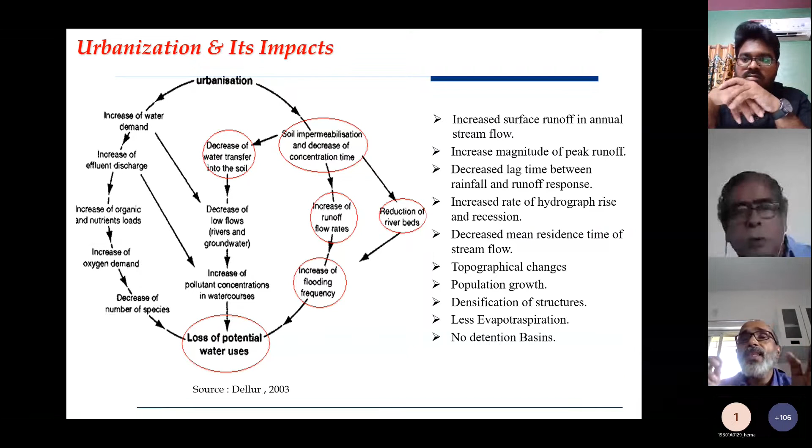In the beginning, there is no planning in most cities, and later when we try to impose something, construction and many activities have already taken place. Cities are developed on river banks or even floodplains of the river, which is a major challenge. That is why land use planning is very, very important in any kind of smart urban development or urban development.

So you see the various issues related to hydrology, when we talk about floods, what is the impact of urbanization? If a normal watershed, normal catchment, for a given rainfall condition, we get what we call a hydrograph - a flat hydrograph. But with urbanization, this can become very peaked. The peak can increase and time of concentration can decrease.

That is a major challenge as far as the hydrology cycle is concerned with respect to urbanization, whatever we are doing as far as cities are concerned. So we need to see how we can deal with this reduced time, and also how we can deal with these kinds of peaks.

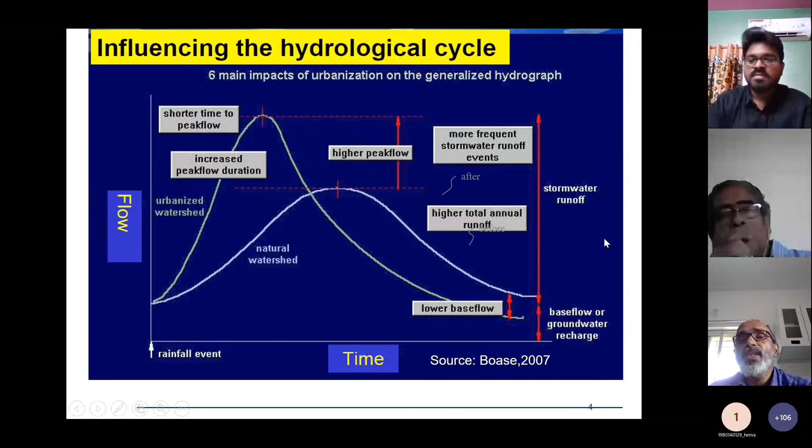As I mentioned, climate change projections say rainfall may increase in many locations, and whatever rainfall takes place will happen in few events - meaning very high intense rainfall can take place, causing flooding events like what has happened in the last few weeks in Europe and other countries, similarly in India also, Bihar and other places. High impact will be there, and all these issues will become flooding issues and hazards.

If you look into flood hazards as far as sustainable development is concerned, floods are the most threatening natural disasters. Whenever we plan anything, whenever we do urban development or smart cities, we need to consider these kinds of urban flood problems.

If you consider India, this is a series of floods. So many years we can see - last year in Assam, flood in Assam, Bihar, now Kerala 2018, Chennai 2015, like that. Every year major floods are taking place in a country like India. Since I am talking from Mumbai, Mumbai also has either major floods or minor floods every year. Flood is there every year.

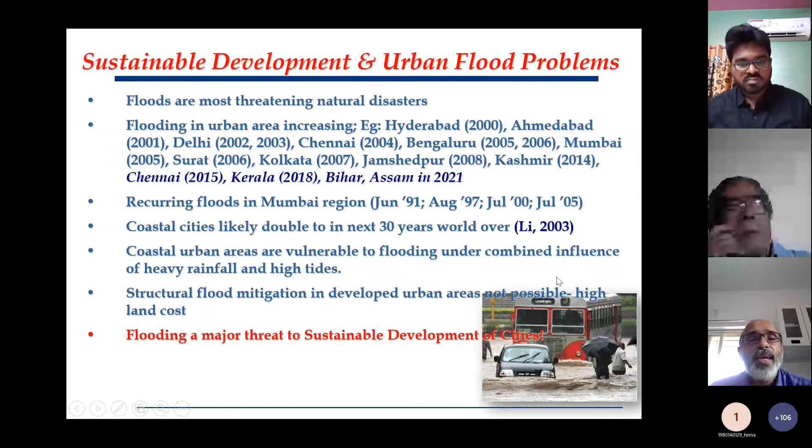So we need to see what is happening, and we need to study it properly, and also plan accordingly as far as urbanization or urban development is concerned. Flooding is a major threat to sustainable development of cities. We need to deal with it accordingly.

When we talk about flood impacts in terms of sustainable development, there are huge impacts - it can be economic, it can be environmental damage, it can be health epidemics, disabilities, etc.

If you take each flood series - for example, I will start since I was also a victim of the Mumbai 2005 flood. There almost 500 people died, and about 70 crores of rupees were lost in one industrial area at MIDC itself. And in the Chennai flood of 2015, about 7 to 10 billion US dollars were lost, and more than 400 people died.

The Kerala flood, which was 2 years back, caused death of more than 300 people, and estimated loss is about 30,000 crores rupees. This is a major issue when we talk about smart development, smart cities, construction technology, or sustainable development. As civil engineers, we need to deal with this and plan by considering all those things.

When you talk about what factors are responsible for this, it is not one factor - it is not only rain. There are human activities, development taking place without considering sustainability - that is one major factor. And then of course natural events like rainfall, and man-made events like climate change. All these are factors. The solution is sustainable development.

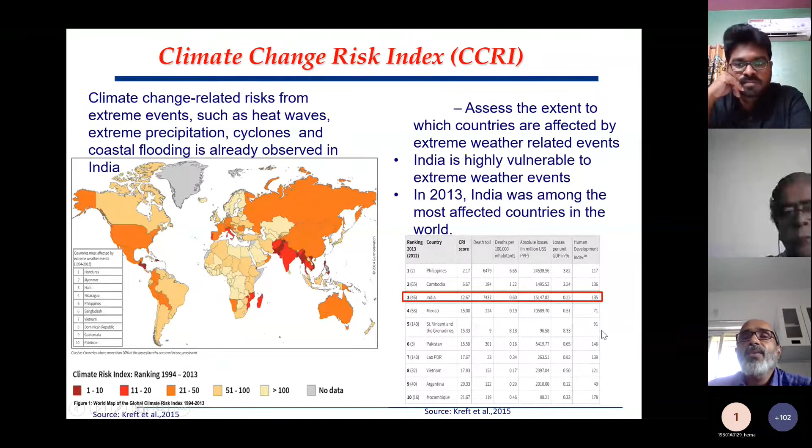So then coming to climate change. We are all talking about climate change. Climate change risk is concerned with risk from extreme events such as heat waves, extreme precipitation, cyclones, and coastal flooding. As per IPCC reports, they have classified climate change risk index. India comes after Philippines, the most affected, then Cambodia, and then third one is India, especially India with so much of coastal region. We have got a climate change risk which is very high. So that way we need to deal with these kinds of climate change influences.

So climate change is concerned with influence of climate change and human intervention on regional hydrology. Changes in global climate will have a significant effect on regional or local hydrology. Then alteration of hydrology caused by climate are complex. The warming of climate has the potential to intensify the hydrology cycle. So these are the climate change aspects.

Especially we are talking about increasing temperature due to various anthropogenic activities. So that way the climate change, we can feel it now. If we assess the last 30 years of data, it is definitely there everywhere, that impact is there.

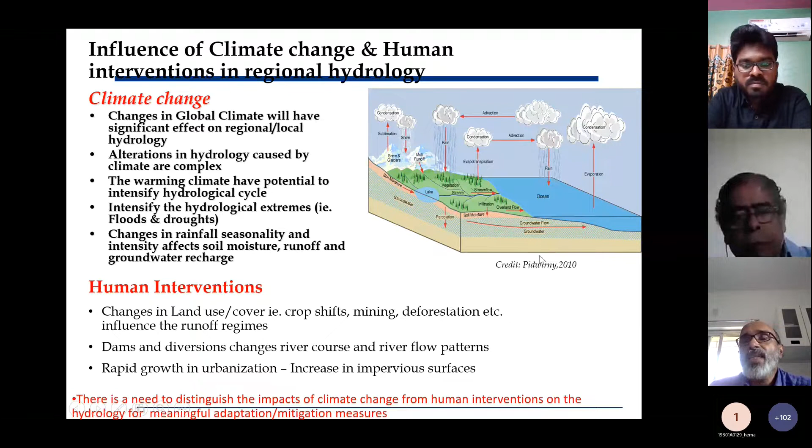And then, as I mentioned, human interventions - it is not only climate change. Whatever way we are developing our development scenarios, like sustainable development, sustainable construction technologies, how we are developing human intervention, change in land use, land cover, dams, diversion - all those things are very important. So whenever we talk about these kinds of assessments, we need to see the human interventions and climate change separately, and then we can also assess the combined impact.

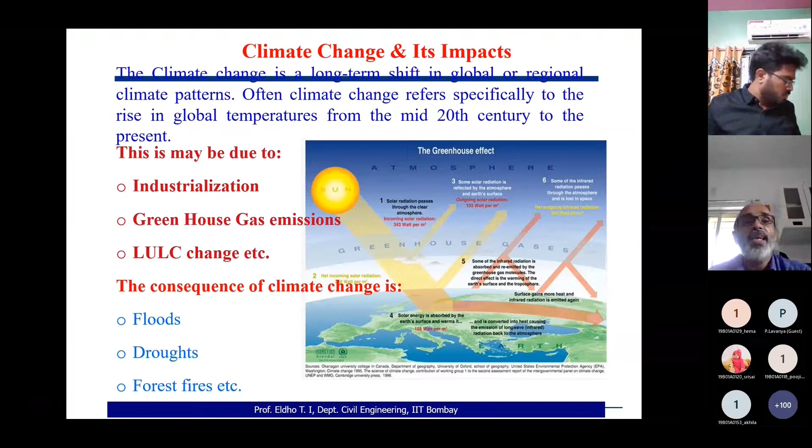And then last year we have heard from Australia, and then other than floods, drought is also in many locations. So even whenever we are having floods, after events of floods, then we are having a very lean period of rainfall, and then it can go to the droughts. So that is the major issue.

So now, as per the latest assessment, AR assessment report number 6, climate scenarios as per IPCC - instead of whatever was earlier, like RCPs, representative concentration pathways was the terminology used in assessment report 5, but now they have changed to shared socio-economic pathways. So this is important, what is currently used is shared socio-economic pathways, and the latest is 2021.

According to IPCC, they are classified into SSP 1, 2.6. So if we can cut down our emissions and reduce the rise in temperature, then we can go to 2.6. But with the current rate, it can go to SSP 4.5. That is shared socio-economic pathways. And then if we are increasing our emissions by rapid urbanization and all kinds of industrial activities, then we may go to even 7 or 8.5, with a very high greenhouse gas emission scenario without additional efforts to contain emissions. So these are some of the main issues.

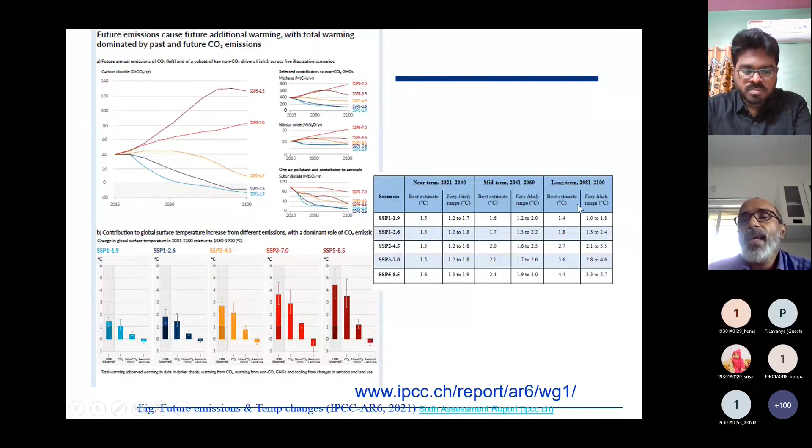The temperature variation is also listed here. What can happen? If it goes to 8.5, the temperature can rise to about 4 degrees centigrade by end of the century. But if we can cut down to 1.4, or even 2 or below, that is the best way we can control many of these issues. So when we talk about climate change and its impact, there is huge impact on hydrology.

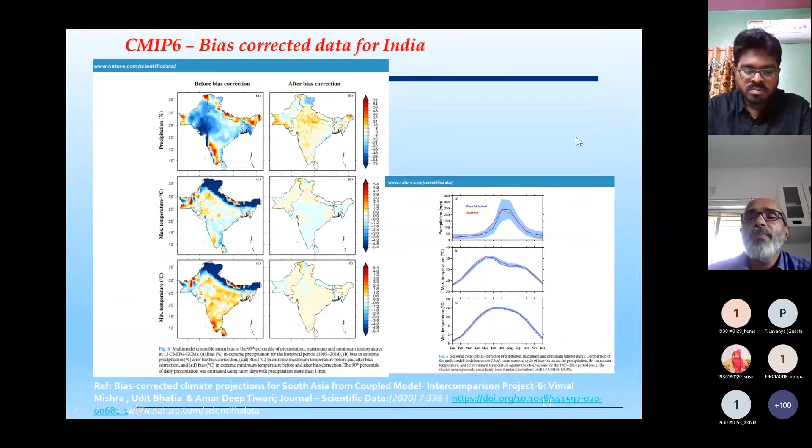This is quite detrimental as far as any kind of urbanization or development is concerned, especially in coastal regions, where there will be a huge impact. Some observations show that if it's not SSP 4.5 or 2.6 but 5 and above, we get approximately 20 to 40% increase in annual mean precipitation, and mean annual temperature may rise by 3 to 4 degrees centigrade by end of the century, as I already mentioned, with mean annual minimum temperature also rising.

This first figure shows precipitation — most places precipitation is increasing. We want the 4.5 scenario, which is the best scenario as I mentioned, compared to the worst scenario of 8.5. At least with 4.5, even at the same pace we continue, many locations will have increasing rainfall, and temperature in most places shows a drastic increase.

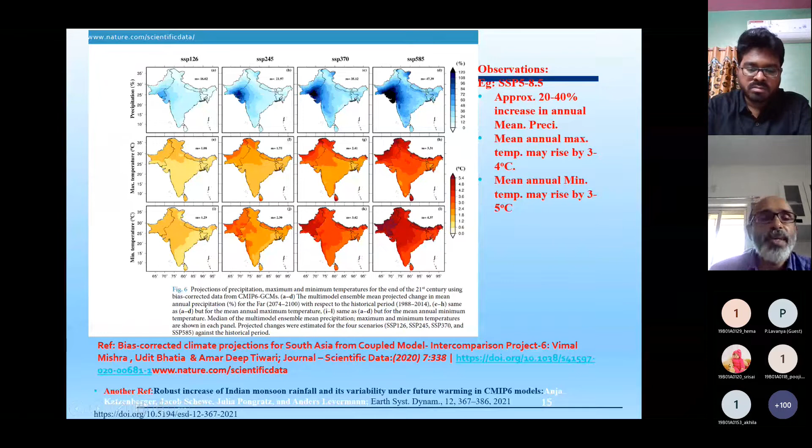You can see here up to 2 degrees centigrade rise, and if it is the 8.5 scenario, the worst case, it comes to more than 3 degrees centigrade. Similarly, minimum temperature will also be rising. Some relevant references are given here. So when we look into climate change and its impact as far as urbanization or flooding is concerned, we need to study it in detail.

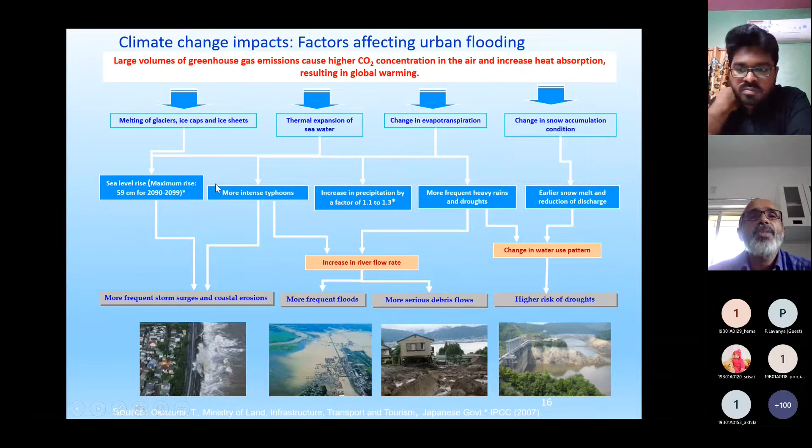Increase in river flow rate, change in water use pattern, all those things will be affected. Even power generation will be affected. We will be having more frequent floods, more serious debris flows like landslides and their impact, and afterwards there can also be high risk of droughts.

So these are some of the climate change impacts, factors affecting urban flooding. Now coming to solutions, as a civil engineer we'd like to discuss possible solutions, how we can study these and go for adaptation measures. For that we need a lot of data and engineering simulations, like hydrometeorological data, immediate water management after forecast, what kind of scenarios we can generate, and what is the best adaptation measure.

In most flooding scenarios, cities are very much affected in local areas. So we need to develop appropriate urban flood models, and based upon that we can develop flood hazard maps. When vulnerable areas are superposed with flood hazard maps, we get a map called a risk map. This risk map generation for all cities is very important.

Some developments are taking place, but all civil engineers can come together to develop such risk maps, and then land use planning can be done appropriately so that no further development takes place in the floodplains of rivers, or an appropriate form of development has to go. Using all this, we can go for impact, adaptation, and vulnerability assessment.

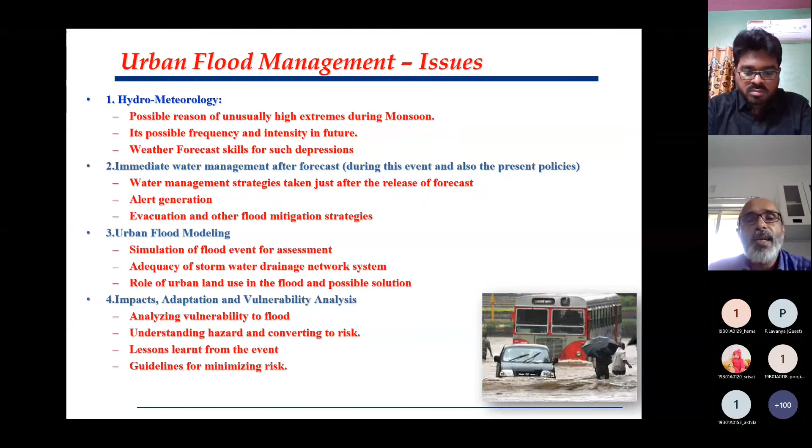Some key challenges include the need to collect a lot of data, like rainfall prediction, drainage, high resolution detailed elevation models - all those things are needed. Then we need to understand the interactions taking place between the coastal region, like tides.

Then if some reservoirs release water, what will happen, what are the impacts of urbanization, what is the initial condition - like whether we can have real-time flood monitoring, sensor installation, maintenance of sensors, etc. So these are some of the challenges.

When you talk about a flood model, the issue is that it is very localized, in small areas, and we need to know minute-wise detail - time is very important. Flood happens in a few hours' time, and then everything is gone, and then it recedes again. So we need to understand minute-wise variation, how it is happening, and also spatial variation.

So we need to develop distributed models, physically distributed models in terms of governing equations concerned with mass, momentum, etc. And then with forecasted rainfall, we need to run the model.

And then identify which area may be affected, give appropriate warning to the people, and take adaptation measures. Adaptation measures are generally possible - we can predict the possible rain for 25 year, 50 year, 100 year return periods, and then go for possible adaptation measures.

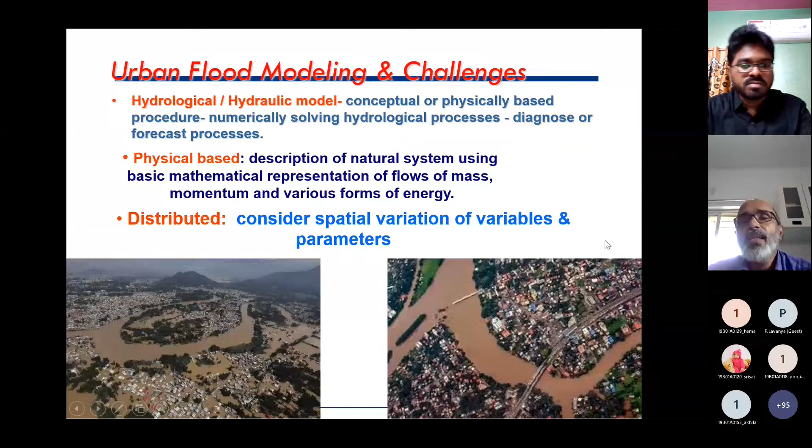Now as an engineer, as part of some projects, we have developed a model at IIT Bombay. So how do you develop a model? I hope all the civil engineers hearing me can think about how to develop a model or how to use existing software to develop one.

We need to know the rainfall, we need to know the overland flow - whatever is happening with respect to overland conditions. The next lecture is by Professor Nagesh Kumar, who will be talking much about GIS and remote sensing.

We need to integrate all these tools together, and go for how the floods are affecting the rivers or channels, and if near the sea, how tides will be affected. We will have a flood model, and when you run it for a given rainfall condition, we get flood inundation maps, and we can depict how it is happening.

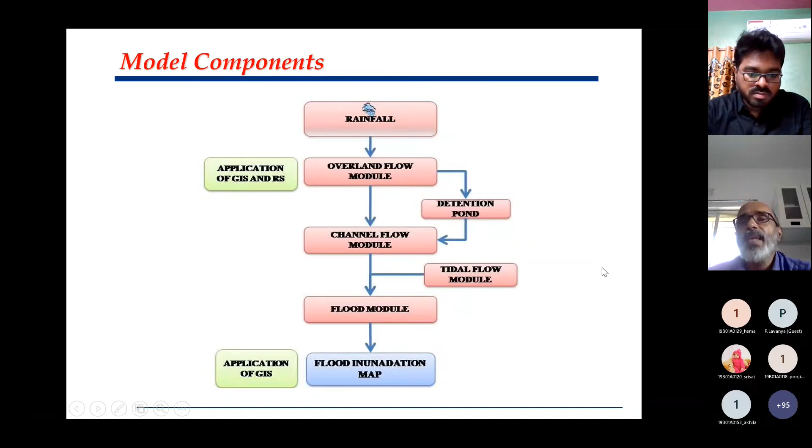So that is what I am going to demonstrate in the next few slides.

Dr. Girish, everything is fine? Can you see everything? Yes, sir. Model component slide. Everything is fine, sir.

So when developing a model, we need to conceptualize. This is called overland flow - this is a river or channel, and then how the flood will be interacting when the rain happens, whether it is going up or down, and that kind of simulation.

Generally, a three-dimensional model will be a very difficult process. We can go for a 2D model combined with a 1D river model. So that is what generally we do in these kinds of models.

Now we are talking about GIS and remote sensing. As I mentioned, very sophisticated tools are now available. Since we need a lot of data, we need to have remote sensing tools, remote sensing data, and GIS tools.

So the requirement of flood modeling tools is that they be readily usable. Whenever we develop such a model, any ground level engineer has to be able to run it and understand what is happening, where there is any possibility of flooding - all those things he needs to study. So the requirement includes tools readily usable for field engineers, requiring no high-level expertise, and easily accessible.

The challenge in computer modeling for urban simulation is that most existing public flood packages are 1D in nature, but you need things like tides and rainfall. So many complexities need to be put together, and it has to come on a GIS platform so that we can visualize which area will be affected and how the flooding will spread.

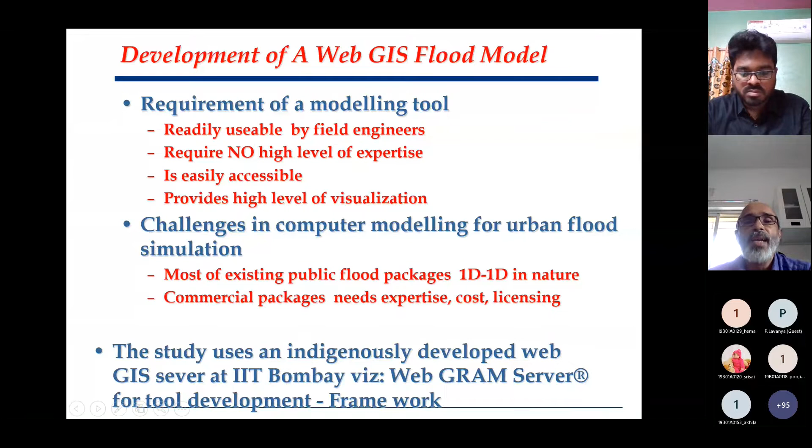So here we developed a model using the flowchart which I showed in the last slide, and put it on a WebGIS server so that we can easily visualize. This is what we have done here at IIT Bombay - an organization intranet with various users. We put this model on a WebGIS server so that it can be accessed by anybody. That is the way we developed this model.

Some details of this model - it is published in the Journal of Computers and Geosciences in 2014, and the model includes these components. We have a flood model with overland, channel, and floodplain components, connected to a WebGIS server through which the entire operation takes place, and each user can access it - user 1, user 2, and so on.

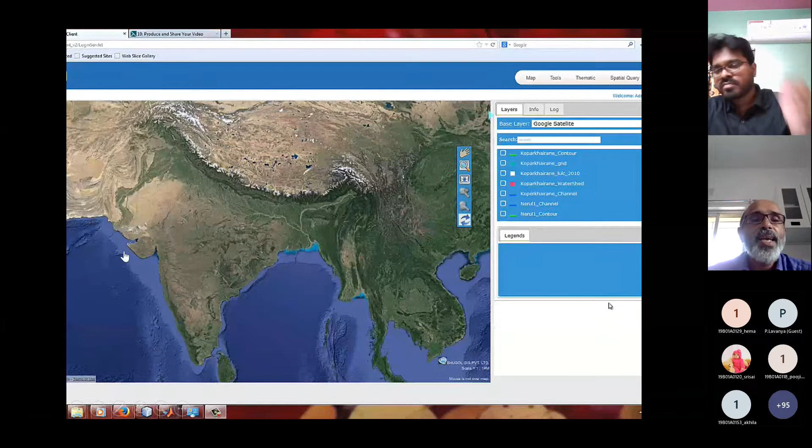One advantage of this model is that it is put on a Google platform, so you can see the Google Map directly. We have developed this model for New Bombay, or Navi Mumbai region. You can see these are the various catchments where we tested this model.

The model input is rainfall and tidal variation - if it is a coastal area, tidal is also an important component. Once you develop a model for a particular region, rainfall is the main component. Once you feed the rainfall, we can directly see the hydrograph, and on the river cross section how the flood will be changing, and we can also get an animation of how the area will be flooded. I will demonstrate that in the next coming few slides.

As part of some projects, we have done a flood study for Chandrapur city in Maharashtra, where most of the city - almost 70% - is situated on the floodplain of the river Erai. You can see here, this is the river, there is the Erai dam, and this is the river flowing, and this is the area where the city is. Most of the city is in the floodplain.

So every year, whenever the river level rises, flooding occurs. One important aspect I mentioned is land use and land planning - here you can see the city itself is developed in the floodplain. So you need to see how we can live with the floods - we cannot avoid the flood every year, but we need to learn how to live with the floods.

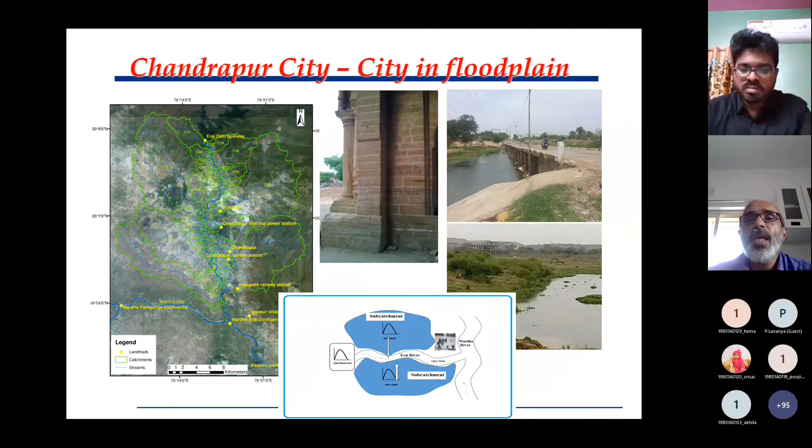So here we used the HEC HMS and HEC RAS model, and then we developed an intensity duration frequency (IDF) curve for 25 years, 100 years return periods. We identified which areas would be flooded and where we had to put a stop on further urbanization in the city, and what kind of measures should be taken.

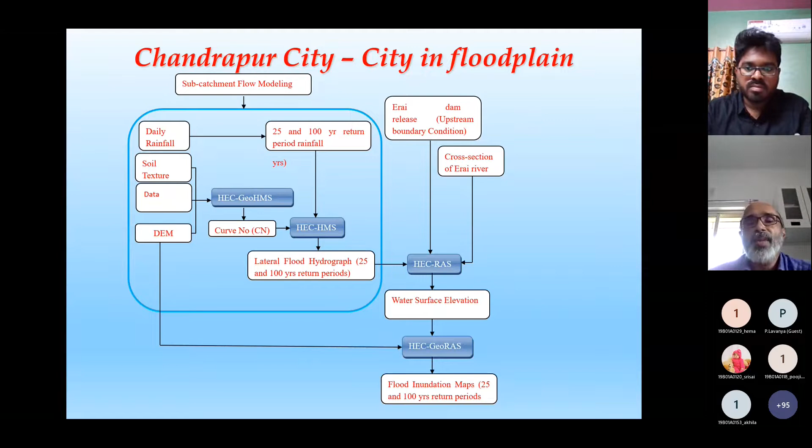This is the publicly available HEC HMS model, and this is the output by putting various boundary conditions and running the model. You can see for 25 year and 100 year return periods, the most affected area in some areas can go up to 15 meters from the center line, though actual flooding above the bank will be hardly 5-6 meters. We can see how the Chandrapur city region will be affected, and most of the city falls in this area.

So we can have these kinds of floodplain maps using even openly available sources and maps. We can develop very sophisticated tools and say that yes, this should be done, and all cities should have these kinds of plans so that further urban development is appropriately managed and there is no further encroachment onto the floodplain of the rivers.

In Maharashtra government terminology, we call this the blue line for the 25 year return period, and the red line for the 100 year return period. So according to this red line zoning, development should be stopped in that region.

Now we are discussing a model developed at IIT Bombay. I will show how it gives the details. This is a flood model case study in the New Bombay region, and the details are shown here.

We developed the model using a detailed based model, and remote sensing tools were used. This is the 2005 July 26 flooding event, and we plotted what was happening. Tide is also involved here; this is a highly urbanized area, about 70% urbanized, and the river flows and joins the creek. With respect to tide and rainfall, we captured how the situation was changing minute by minute.

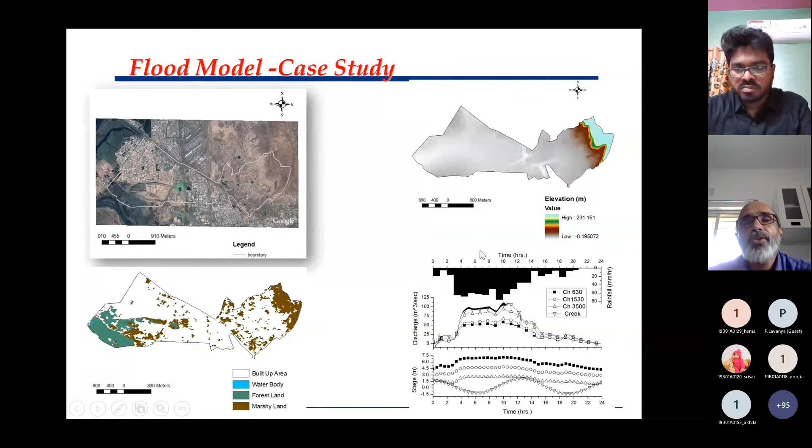I will show some simulations - there is a detention pond also, and this is the coastal area showing how flooding can happen. This is the first 2 hours, then the 6th hour, and I can plot every hour. I'm showing only 12 hours when the tidal cycle is over, then after 20 hours it recedes back, showing how the flood recedes.

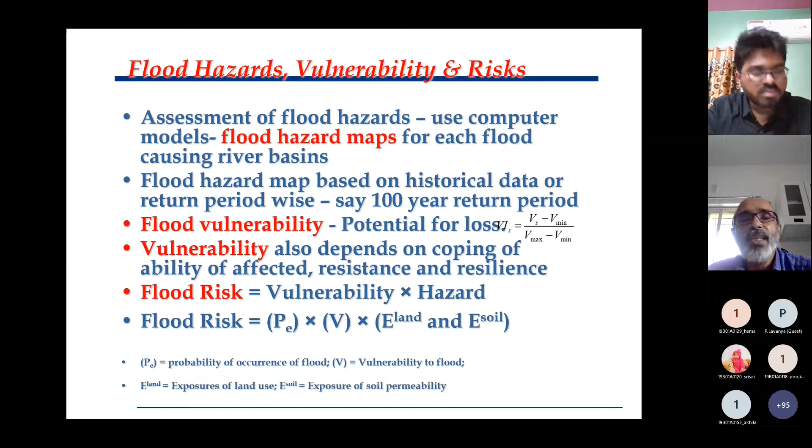This way a flood hazard map can be generated, and when you combine it with flood vulnerability maps, you get the flood risk map. Flood hazard maps for each flood-causing river basin are prepared based on historical data, and flood vulnerability maps depend on coping ability, resistance, and resilience of the affected population. So flood risk equals vulnerability multiplied by hazard.

This is used for another area in Mumbai city, like the Mithi River, where the airport and IIT Bombay are situated. You can see how flood hazard is classified as very high, low, etc., using HEC HMS with a 100-year return period for the Mithi River basin.

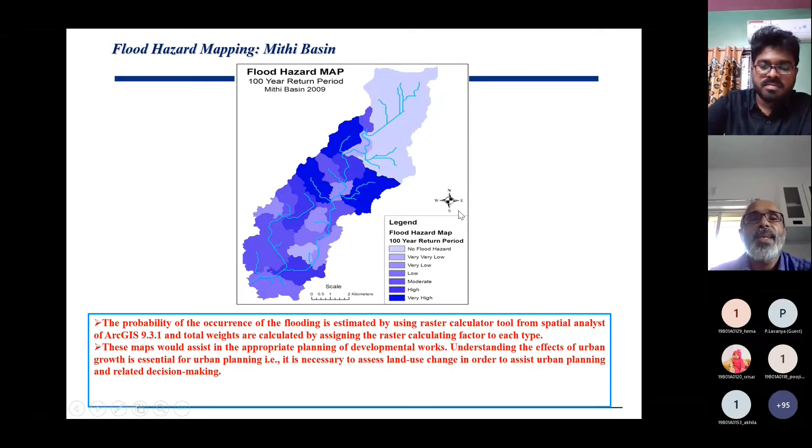One advantage is that if a builder is going to build a building, people will know whether the building is in a high risk area, so they should not buy there, preventing further development in that area. This kind of risk map is very important for most urban areas.

And also now, as I mentioned, we deal with floods, so we need to have a disaster management cycle, and a disaster management center should be there.

After the 2005 flooding, Mumbai city has developed a very efficient disaster management cell, where all the data are connected and they give appropriate warning. But a live flood model is still not implemented for Mumbai.

So finally, to conclude, in any urban development, this is a situation in Cochin airport in 2018 August flooding. So urban flooding is very detrimental and the most impactful, highly disastrous event with respect to our sustainable development.

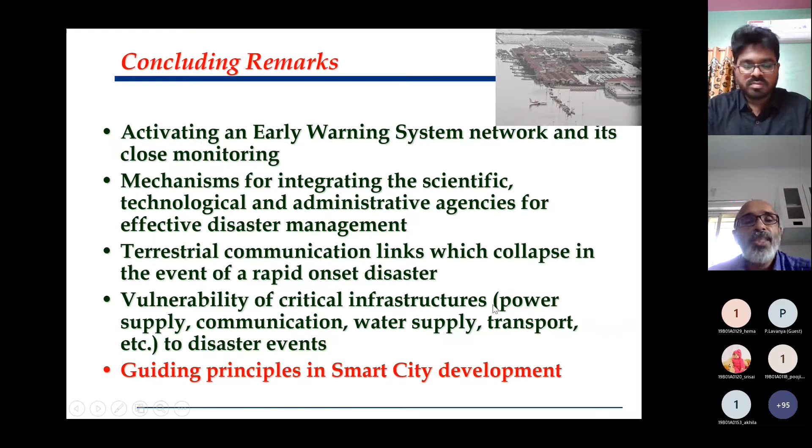We need to integrate scientific, technological and administrative agencies for effective disaster management, and the guiding principle in smart city development is we need to see these kinds of vulnerabilities and then make appropriate mitigation measures.

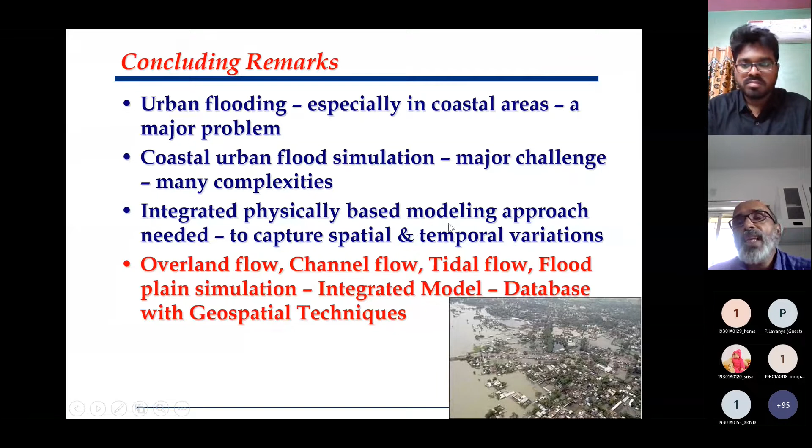So urban flooding, especially in coastal areas, is a major problem. Coastal urban flood simulation is a major challenge. I have already mentioned some of the major challenges, including various aspects like climate change. So an integrated physically based modeling approach is needed to capture spatial and temporal variation.

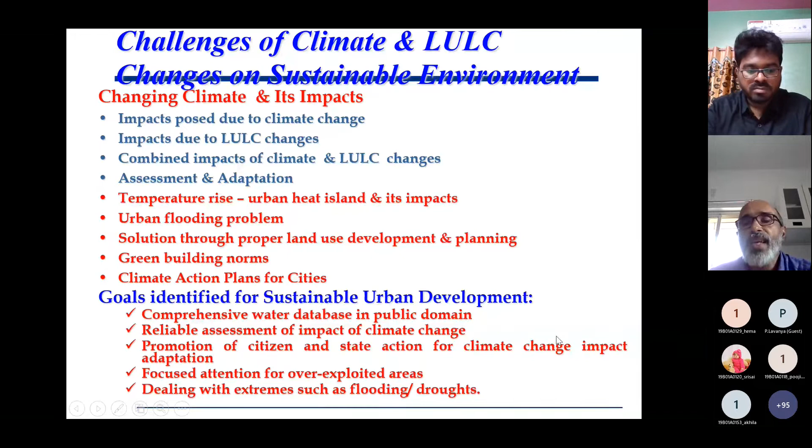This conference is a very important topic, like sustainable construction technologies and advancement in civil engineering. I have seen the list of speakers, and so many topics are covered. I hope all of you will be able to enjoy, and I look forward to seeing the impacts later from Dr. Girish. I'm very happy to give this lecture. If you have any questions, one or two, or very specific questions, I'll be happy to answer, maybe in the coming 2-3 minutes.

Thank you, sir. Thank you very much, sir.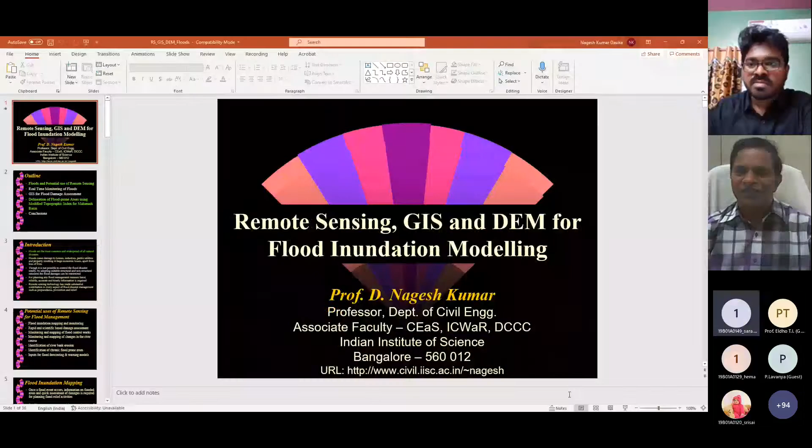Thank you. You need a glass of water now. Your introduction is so elaborate. Thank you very much for that. Can you please confirm that you can see the slide? Yes sir, yes sir, it is visible, sir. Please proceed, sir. Thank you.

Let me first congratulate Professor Girish and his team for doing this event, which is not easy, especially in this pandemic situation, on a very important topic of sustainability in civil engineering, because civil engineers can either make the whole world sustainable or unsustainable based on how we propose to improve the lifestyle for our citizens. So we make a big impact, and to ensure most of what we do is actually sustainable, this conference is really timely. I really appreciate the effort put in by Professor Girish and his team to make this event happen. I'm seeing there is a galaxy of good keynote speakers, and that itself will be a huge value addition for all the participants.

What I would like to do now is briefly talk about some very useful tools like remote sensing, GIS, and DEM for flood inundation modeling. Girish, without any hesitation, tell me when it is 5 minutes before my talk ends, because I don't want to cross the schedule. So we'll briefly talk about these 3 tools and how we can utilize them for flood inundation modeling. But before going into details, let me mention what I am trying to aim at through these 3 tools.

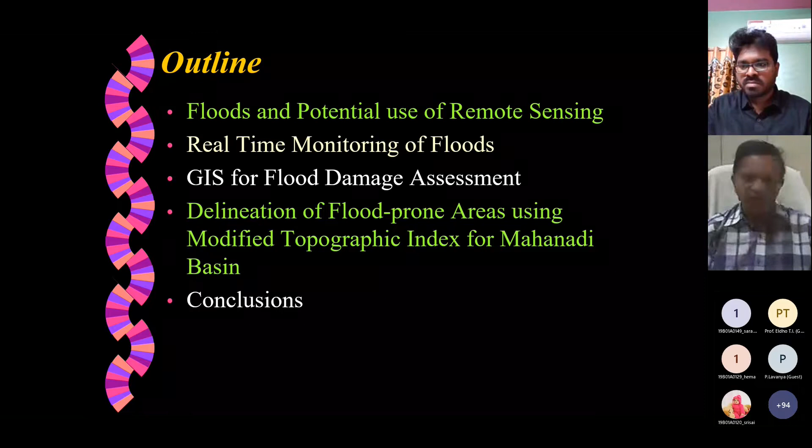But before I get into that, let me briefly talk about how we can use these tools, remote sensing, GIS, and DEM. We can talk about floods and their potential use, then real-time monitoring of floods, GIS for flood damage assessment, delineation of flood-prone areas using modified topographic index, especially for Mahanadi Basin, which I'll try to demonstrate. And based on that, I'll try to conclude.

As we know, floods are the most common and widespread of all natural disasters. Floods cause damage to houses, industries, public utilities, and property, resulting in huge economic losses apart from loss of lives and habitat. Though it's not possible to control the flood disaster totally, by adopting suitable structural and non-structural measures, the flood damage can be minimized.

Structural measures include constructing flood banks or levees, dams, barrages, etc. to control floods. Those are all structural measures. Non-structural measures means if you already have a structure, you can close the gates of a dam so that the flood waters are impounded in the reservoir, and downstream there is no impact of that flood. Such measures, non-structural measures, both can be done.

But for planning any flood management measure, latest, reliable, accurate, and timely information of the flood is required. Remote sensing technology has made substantial contribution in every aspect of flood disaster management, such as preparedness, prevention, and relief. I'll briefly mention about them.

Remote sensing can play a role in flood management in various aspects, starting from flood inundation mapping and monitoring—that's the easiest aspect. Then rapid and scientific based damage assessment, for which we have to use GIS along with remote sensing. Also monitoring and mapping of flood control works.

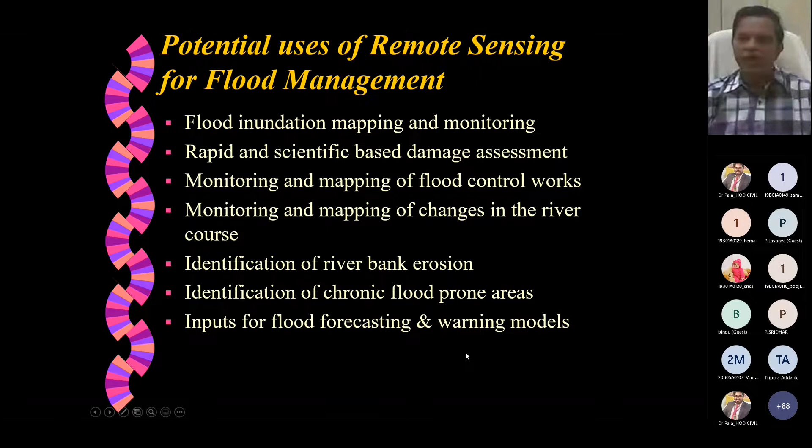If you already have, let's say, a levee, is it working? Flood bank, is it working? Is it breaching somewhere? Is there any potential location? Monitoring and mapping of changes in the river course, like river meandering, can be monitored. Identification of riverbank erosion which may finally result in breach of a bank or canal or a river. Identification of chronic flood-prone areas, inputs for flood forecasting and warning models. In all these things, remote sensing plays an important role.

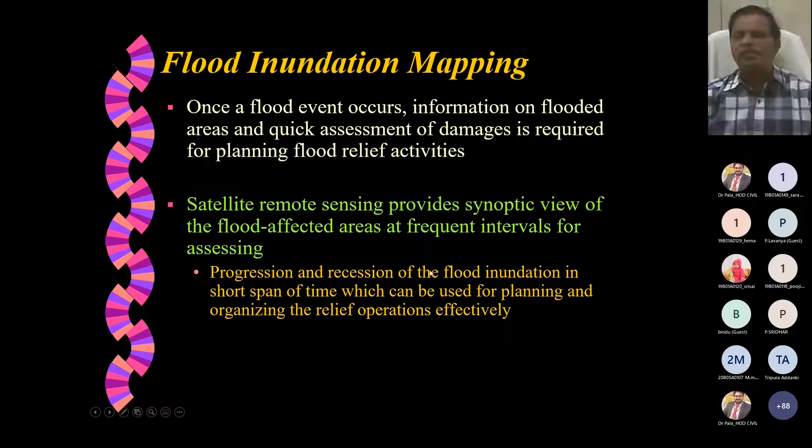Once a flood event occurs, what we try to do is get a satellite or aerial image of that location as quickly as possible, and that gives us an idea about the amount of inundation. Satellite remote sensing provides a synoptic view of the flood affected areas at very frequent intervals for assessing progression and recession of the flood inundation in a short span of time, which can be used for planning and organizing relief operations very effectively. For any relief operation, first you should know where you should go, and these maps or images help us a lot.

Okay, so that's one major advantage. In synoptic view, the entire reach of the flood zone can be monitored.

If you know the size of a pixel, for example, if a pixel on the ground represents 100 meters by 100 meters, then if you count how many pixels are there in the flood water and multiply by 10 power 4 square meters, that is 100 into 100, you know the total area under floods.

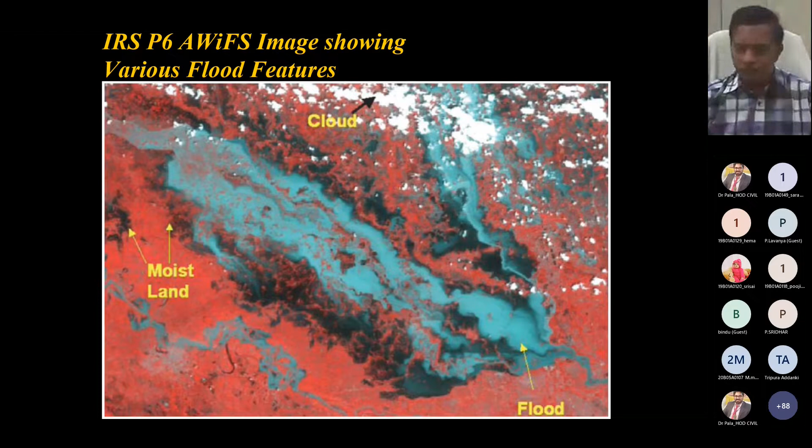For that, what we try to do is use geographic information system. GIS basically helps in flood monitoring and assessment in various ways. First of all, we collate and prepare different maps - for example, a village map, a district map, or a state map. You digitize them using the GIS platform, scan them and geocode them, so all those maps are available to you. Collection and processing of data is the first thing we do, to create this database and keep it ready.

You don't start doing it when the flood is happening - you do it much before. All these maps are prepared and kept ready: what are the villages, what are the boundaries of those villages, where is the agricultural land, where is the forest land, where is the railway line, where is the road line, canal line, river line. Many things - all these maps are prepared as multiple layers and kept ready, all for the same region, so they can sit one over the other as transparent maps. That's what we try to do through GIS.

Then we can try to extract thematic information, such as how many villages are there in a district.

What is their total area? Or how much is the total length of roads in that district or in that state? Such information can be extracted, and we can try to put that as layers also. Let's say I want to see how many villages are there very close to the river, at a distance of about half a kilometer from the river reach. Map all those villages - that's a query you ask in GIS. It can use layers of information, the river map and the village map and village boundary map, and based on that prepare and show the result. So query-based analysis can be done, and that is called knowledge extraction from GIS.

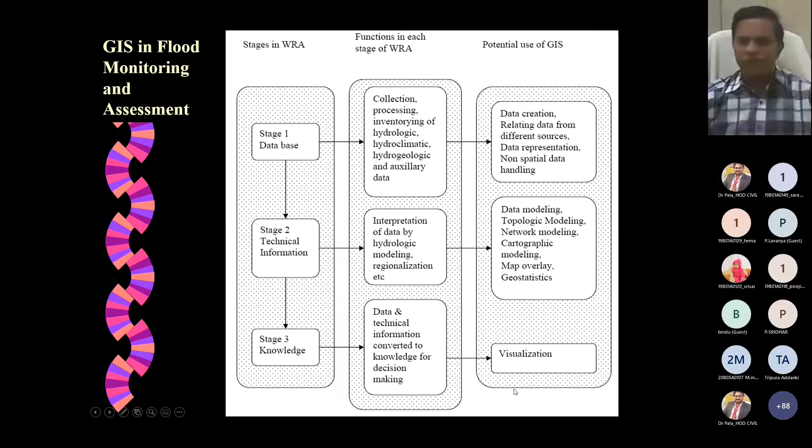So let us see how remote sensing and GIS can together be used now. Let's say that from remote sensing we have prepared a flood layer, flood map. And from our earlier GIS databases we have village map, agricultural map, forest cover map, rail network map, road network map.

So now what happens? If I put the flood layer map over the village map, I can talk about the villages that are maroon. Count pixel by pixel, I can count them and say how many villages are maroon, to what extent - whether the entire village is maroon, or only a portion of the village is maroon.

If only a portion of the village is maroon, then we can try to move all the villagers from that marooned or likely-to-be-marooned area to the non-maroon or non-flooded area within that village. So you have cyclone shelters or flood relief shelters, etc., based on that.

In the same way, how much agricultural area is marooned? For the rail network, where do you want to stop the trains because of the floods? For the road network, all this can be done - this portion with remote sensing and this portion with GIS.

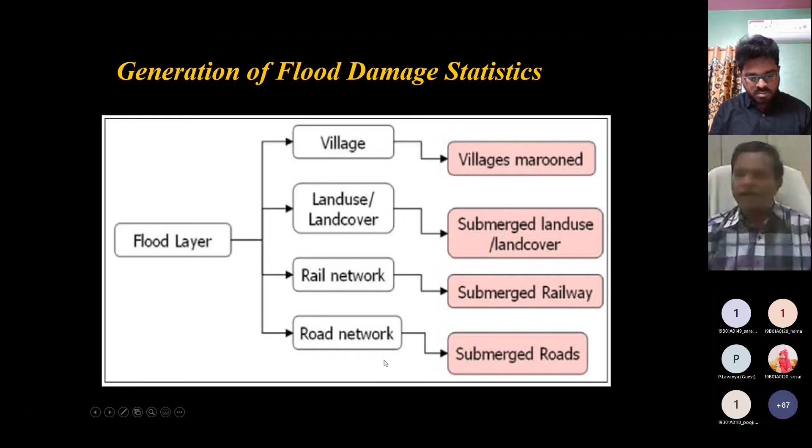Then the next thing I want to use is DEM, or digital elevation model, which you have done in your surveying class also. You take a dumpy level or a total station and try to get the elevation data using that dumpy level or total station, using staff gauge and other things.

Now when you note down data in surveying, you not only note down the elevation, but also the location where you are getting that elevation - XY coordinates, or latitude and longitude. So if you give me the XY coordinates and the elevation at a given location, and store it on a computer database, it becomes digital elevation data.

If you want to play around with it, it becomes digital elevation modeling. So that's what we try to do now, apart from remote sensing and GIS. If I know the elevation, and if we also know the distance, tan theta gives you the slope. That's the simplest concept I want to use now.

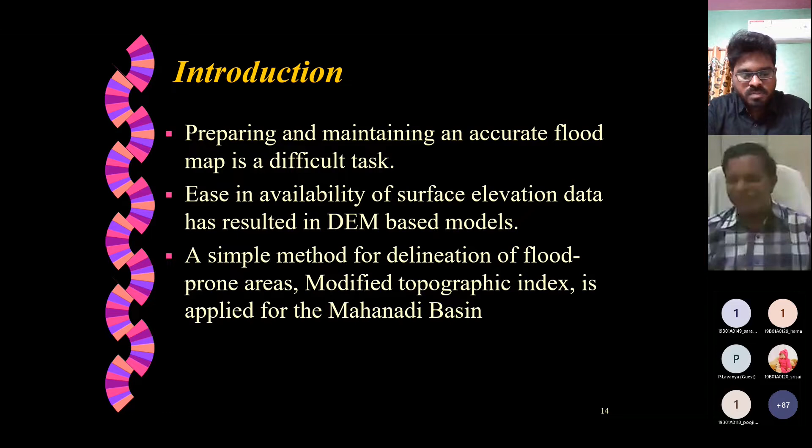Once the depth is known, where that water will flow will be known through slope. And slope will be known based on tan theta. I want that tan theta now.

So using the concept of tan theta, there is a topographic index proposed here, Kirkby. It's a simple thing: log of AD divided by tan beta. Tan beta is nothing but the local slope, which can be obtained through the DEM. AD is the drained area per unit contour length.

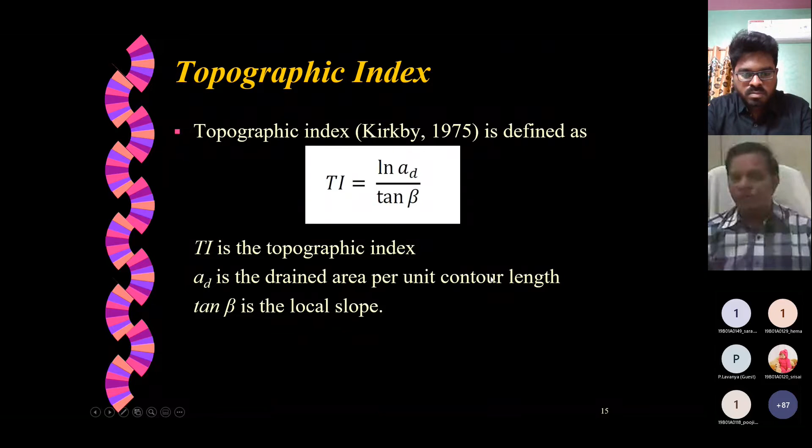When you do surveying, the next thing you do is plot the contours. Contours are basically lines joining points of equal elevation. So using the area between two contours and the local slope between those two contours, we try to use the topographic index. This topographic index is slightly modified afterwards by Manfreda.

Using this, we try to measure the topographic index for every pixel, for every point where we know the elevation data. Once we estimate that, we say, okay, if the topographic index is above this threshold, it may be, let's say, in the range of 0 to 1.

If it is above 0.9, I call that a flood inundated location. And if it is below 0.9, it is a non-flooded pixel. Like that, I try to do it for every pixel in the entire river basin. But what is the threshold? I don't know.

So what we do is, for a given flood magnitude, we already have the flood map available from National Remote Sensing Center or somewhere. I know the magnitude and I also have the map. So now I try to play around with this threshold in such a way that the map I generate matches the map that is already observed. Once those two match, I say this is the threshold I should use for this flood magnitude.

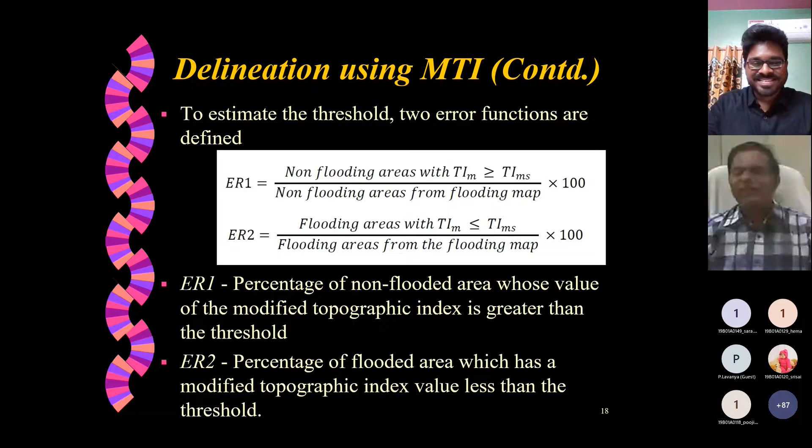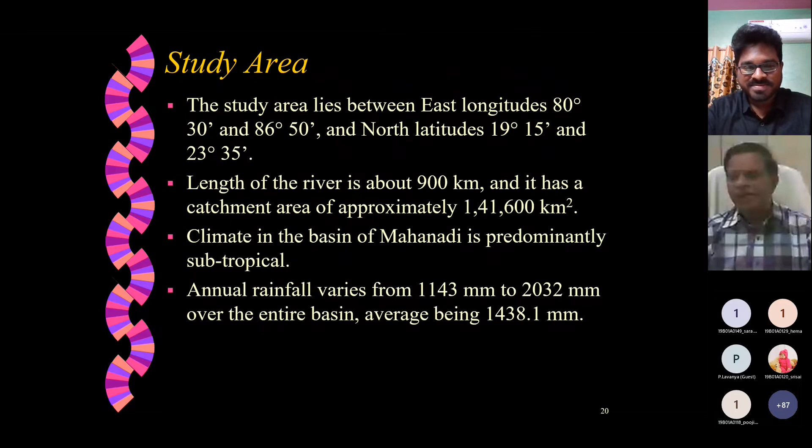So we try to prepare different thresholds and try to match with the flood inundation map. There could be two errors, error of omission and error of commission. These are called ER1 and ER2. That's what is estimated for different thresholds for the Mahanadi River Basin.

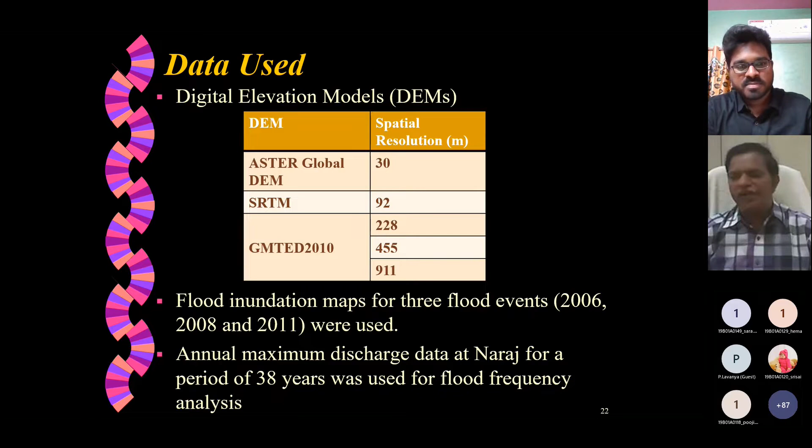For various spatial resolutions of the DEM, we try to prepare the flood inundation maps and see which DEM is doing better. We found that among all the DEM databases we used, SRTM DEM is doing very well. So we use that DEM to prepare flood inundation maps.

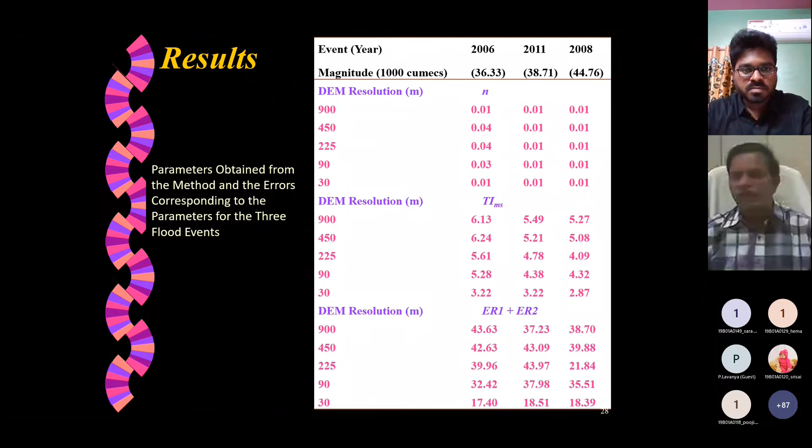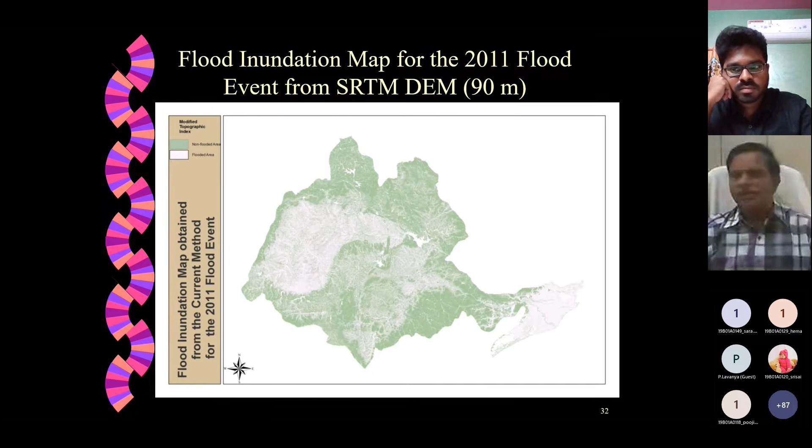I have shown it to you for 3 events, and those 3 events maps are shown now. These are prepared from DEM data using the modified topographic index for 2008, 2011, and so on. Now we have different thresholds for different magnitudes.

So give me any flood magnitude, and I'll tell you what could be the threshold value you should use. Use that threshold value to prepare the flood inundation map. That's what you can do by integrating remote sensing, GIS, and DEM to talk about preparation of flood inundation maps.

That's the main advantage. You can not only talk about the magnitude, but you can also talk about the map corresponding to that magnitude. That's what I want to conclude as far as this particular topic is concerned.

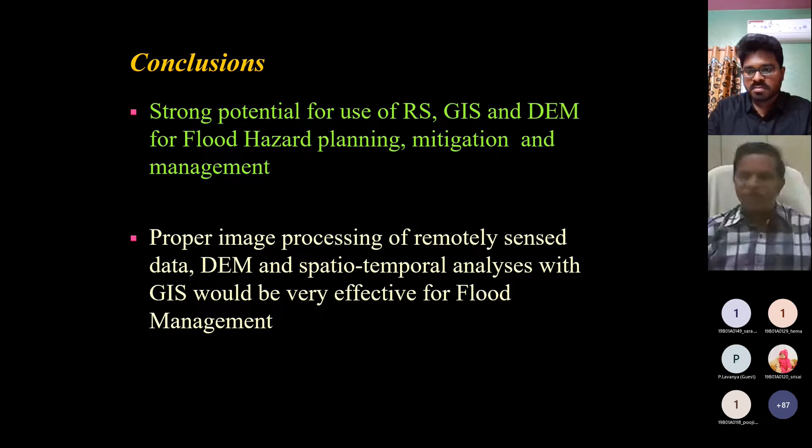And if there is time, I can take questions. Otherwise, you can always send a communication to me, or you can refer to this paper based on which I presented this work. This is an MTech student's work, Apurva, she was my former student. Thank you, this back to you.

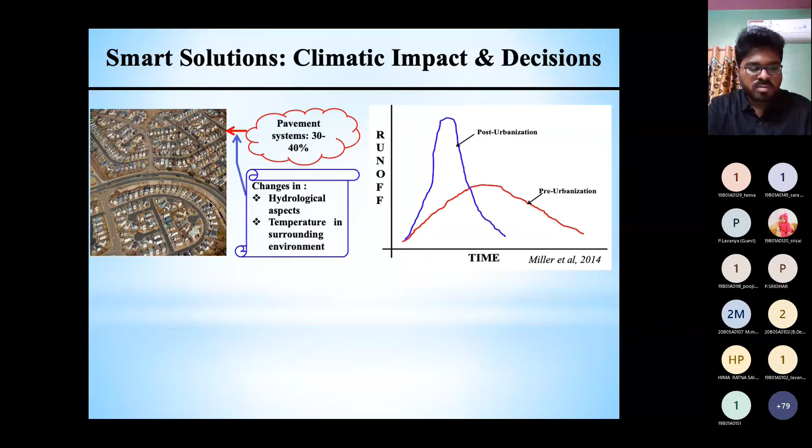One of them is the hydrological, the other is the temporal, the temperature effect. If you look at the global climate change, there are a few places which were really warm previously, but now they are cooler, and some of them were cool in the past, but now they are warm. So what is happening? It's because of the urbanization.

And as we all know, most of the people are migrating from the villages to the city side, obviously for several reasons - it could be socio-economic, it could be other reasons also.

So if we talk about this surface runoff over time, that's a classical plot that you see. And what we are looking at, if we talk about this right plot here on top, we are trying to construct or build the urban areas, but still be within the pre-urbanized setup. What does that mean? We are still in the sustainable regime.

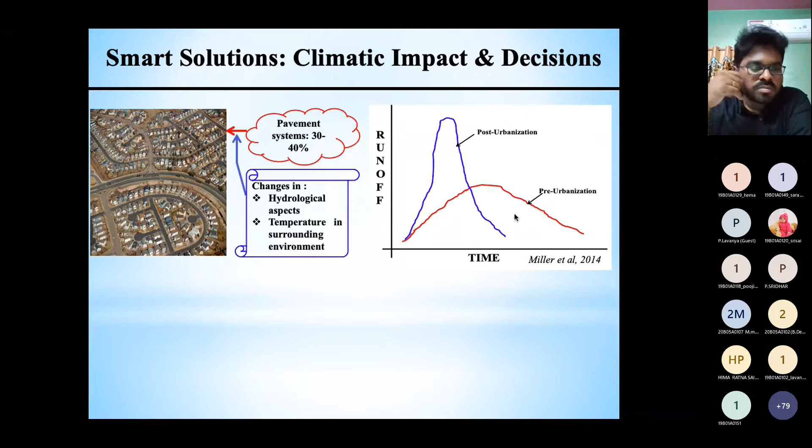We build, but we make sure that the materials that we use or the products that we are developing are all sustainable, meaning there is not much change with hydrological and temperature conditions in the surrounding environment.

Now for that, what you should be doing is you need to have better recharge of the groundwater, and for that you need to also have reduced runoff. So if it precipitates, as it is happening right now in many parts of the country, you make sure that it does not run off - surface runoff will be minimized and it increases the groundwater recharge.

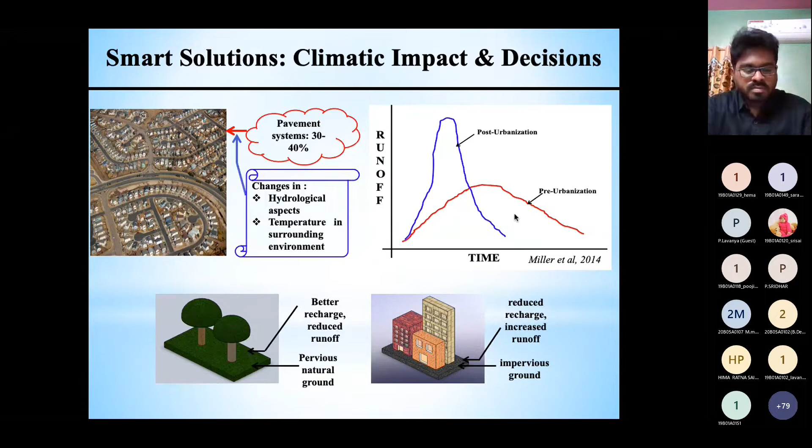And for that you will be needing pervious natural ground. But can you have pervious natural ground in cities? Yes, of course you can. Instead of actually having fully impervious ground such as concrete, what you could do is come up with other solutions such as porous materials - could be porous asphalt, porous concrete.

One of the things that we have done is the porous concrete, pervious concrete - they call it permeable concrete in some places. One thing that it can do, it is a good strategy for stormwater management.

As you can see here, you have a lot of water stagnation, urban flooding taking place, and that could be curbed. Recently in Bangalore there was a lot of floods, and people could not go to the airport on time, and they had a lot of difficulties. Some of the solutions that we have developed - this is one of the strategies.

Now, 3 demonstration sections - I'll not go into the details of what is pervious concrete and how it was made, because they're all published articles, but what I thought I'll share with you are 3 or 4 different sections that we have built and what we did with that material.

The first section was built in IIT Kharagpur way back in 2017, June. It still exists, but just clogged because of low maintenance. This is what happened - incessant rainfall, about 55 hours in July 2017, and you can see this is the only area which did not get inundated.

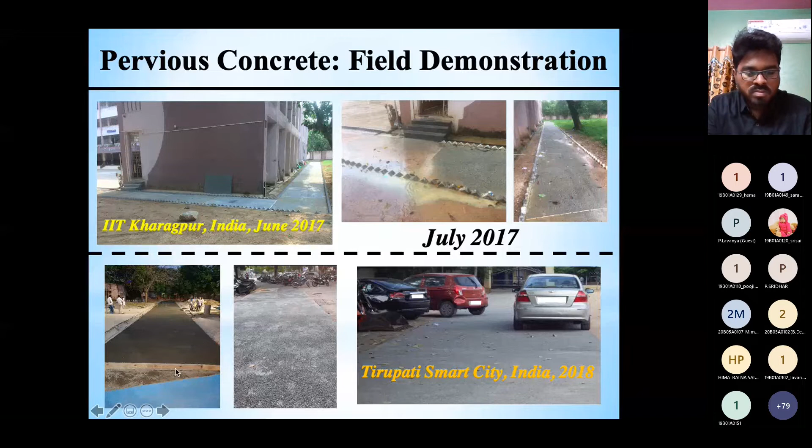And the second thing that we constructed was in Tirupati, that's Smart City Municipal Corporation of Tirupati premises, and it still exists, by the way. It's being used by cars, trucks, and so forth. It was built within a record time of 2.5 days, about 120-meter long stretch.

And then on IIT Tirupati campus, we have built that also. If you happen to come, please visit us and I'll show you. We have actually embedded pipes within the pavement section where you can read the data, get that water out, retrieve it, and then use it for some other purpose.

So the pipes are embedded within the pervious concrete, and we were successful in doing this. One of the other things I should mention with IIT Tirupati is we tried RMC, ready mixed concrete, and that really worked out. I should say probably we are the first people in the country to use RMC for pervious concrete. We were very successful, and we also used geotextile to prevent tensile cracks coming from the bottom.

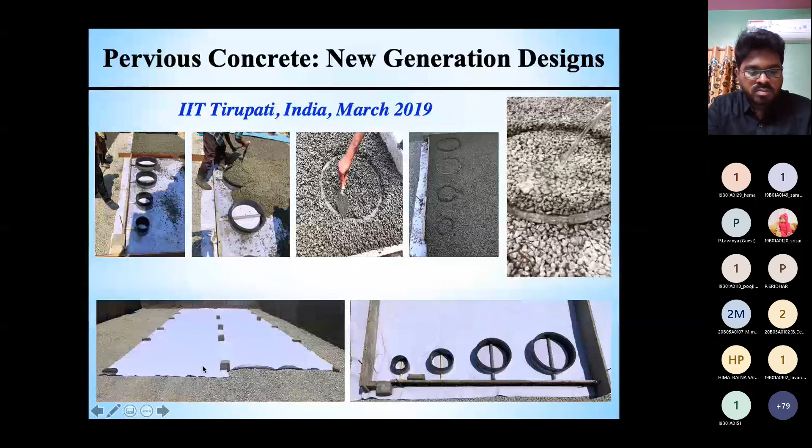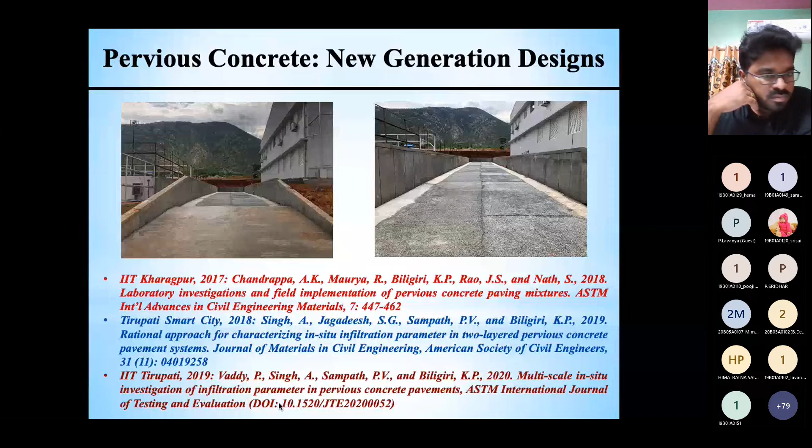So you can see this is the final product. On one side there is RMC, that's fully consistent design there. On the other side we have the in situ mixer being used. So all 3 different locations, we have actually published those. Please visit the different journals and you can get the details of how they were constructed, how the mix designs were performed, and how they are still performing over time.

Okay, and the other thing I thought I should share with you, this is a new latest product, 2021. In fact, just a couple months ago we had a PhD finishing up. So we have come up with a paver block, and this will be used on rural roads very soon because we have had collaboration with Kerala Highway Research Institute. We're also talking to the National Rural Roads Development Agency to come up with some test sections with pervious concrete. We call that PARAMpave.

As you recall, the pervious concrete, the ones I just showed you, some of the test sections are all low to medium volume roads. They have low strength because of very high porosity, so they cannot be used on highways. So we thought, okay, we will come up with a new product that could be used not only on low volume roads, but also on medium and high volume roads, such as highways, highway shoulders, medians, and so forth.

So what we did, we have come up with a composite now. It's a square composite, you can see here, 30 centimeters square. We have 2 slits in the bottom that can drain water out, and we will have pervious concrete within those holes and also on top. So it's a composite section, 30 centimeters square. That's the block.

It's a paver block basically, a 90 millimeter section. It's a 90 millimeter thick section with a PCC layer as the base course. That will act as the resting ground for the pervious concrete that will be placed on top of it. So it's a 30 millimeter section.

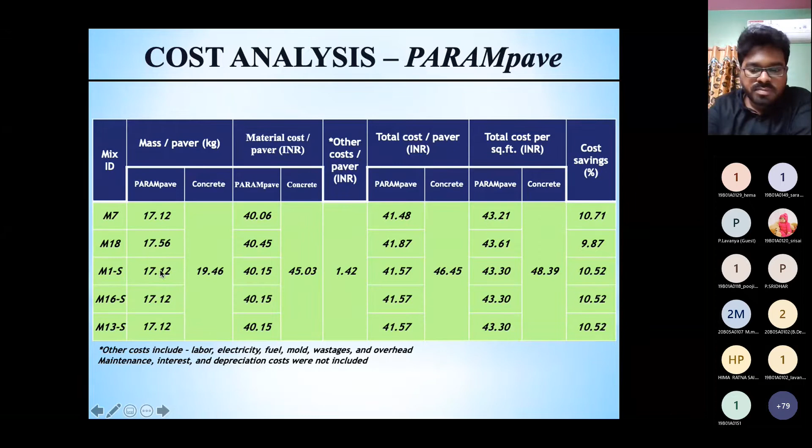And this is the cost of each of the paver blocks. So we have conducted experiments on approximately 18 types of mixtures without sand and 18 with sand, so about 36 mixtures. And if you look at the mass of each of them, it's about 18 kilograms, so it's a baby, right? Versus the concrete paver block of similar size, similar dimension, it's about 20. So you're lighter with this material.

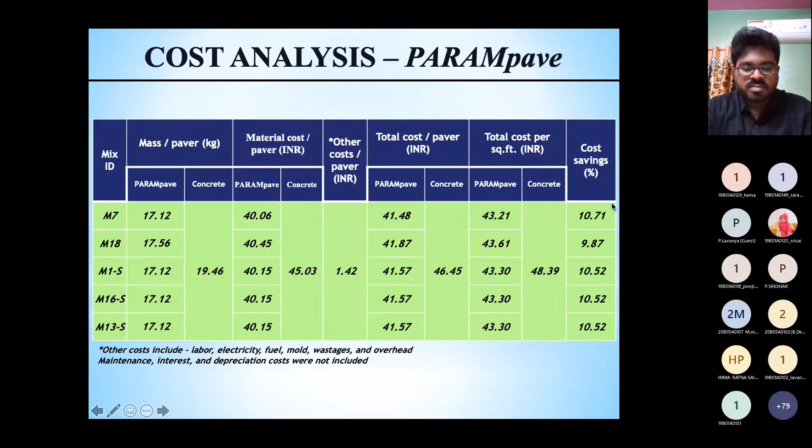What else have we done? We've also done some life cycle assessment. If you recall what I told you in the beginning about the visions.

One of the things we really have to do is the life cycle analysis. Why? Because we have to look at the overall design life, make sure the product lasts for the entire design life, and also could be reused when the product has served its entire life.

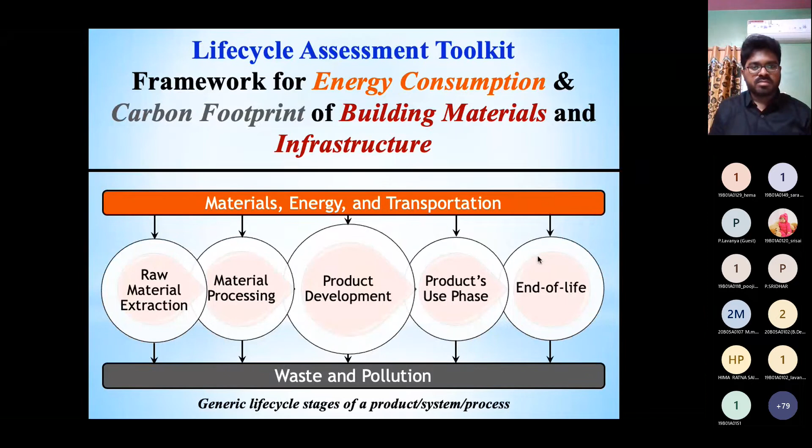If you look at the LCA framework, we have extraction, processing, development, use phase, and also end of life. Can it be reused or will it become waste? Even if it becomes waste, it should be reused somewhere. That is what we have tried, and we have come up with this framework for our own pervious concrete pavements, including the PARAMpave that I just mentioned.

It's a published document, please visit this. It's a top journal in the environmental sustainability area, impact factor of almost 10.

So what we did, we have come up with a toolkit. It's open source, and if you wish, we can help you with this. What we are trying to do here is calculate embodied energy, kg CO2 equivalent, and capital cost. What we have approached is not the entire system, because we don't know when the pavement will fail or when the service life will get over. So what we have done is a cradle to gate approach, that's until construction and placement, which is still not bad.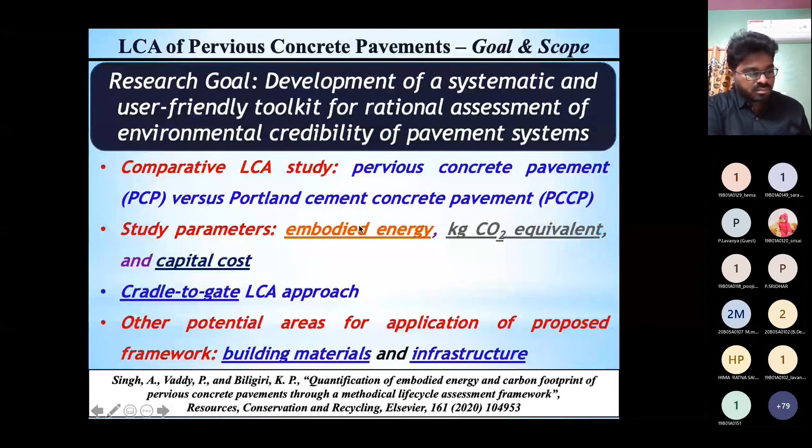This framework could be used by any other material as well, not just pavements, but also any other. So if you look at this, there is energy that's being input when you are producing the material, the mixing phase, we call it. And the other thing is the energy that comes out, that's the GHG, greenhouse gases, correct?

So this is the product, and you have a functional unit of 1 kilometer. That's what we used, and for some others you can use it, you can keep tweaking it depending on the situation that you have. 3.5 meter wide, so 1 lane road, 35 centimeter thick section with 15 centimeter of pervious concrete and 20 centimeter of granular base course.

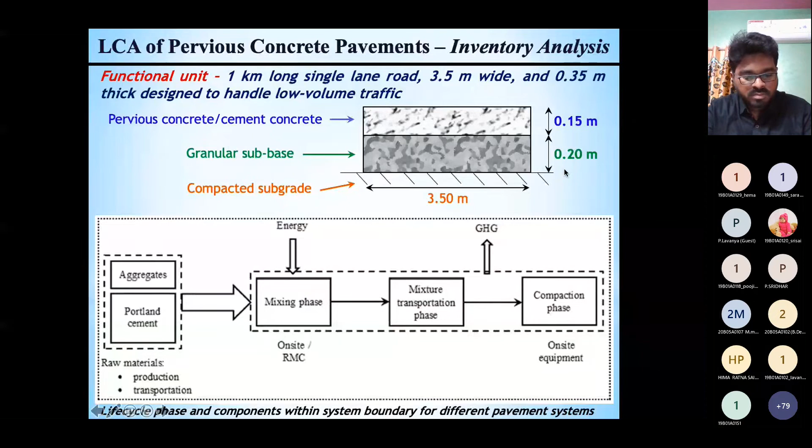If you look at the results, we had about 3% lower energy coming from our pervious concrete, which is something very encouraging for us. And what we have seen later on with Param Pave, this is with the regular pervious concrete - what we have seen with the Param Pave product is at least 7 to 10% lower LCA. So something very encouraging for us, and we have tried this.

What we expect in the future is to also start calculating life cycle cost, because that is something we have to do - includes maintenance, intervention, salvage, and many other things. So that's the big data we're talking about.

The next product I thought I'll share with you, that's also very close to my heart over the last 17 years that we have been working on, is asphalt rubber - rubber modification in binder. And what we have seen over the years, at least that I have seen, and my predecessors who have worked on this product for almost 40, 50 years now, is that it's not just a durable product, but also has a very low life cycle cost.

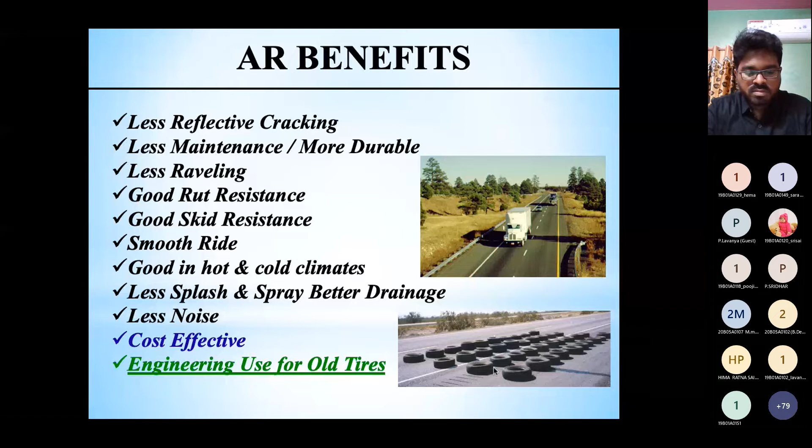Now coming to the environmental perspective, definitely engineering use of old tires - how much? Approximately 15,000 tires per lane kilometer. That is the estimate coming from the global scenario. And what we have done, we have come up with a new generation product at IIT Tirupati, I'll share with you in just a minute.

If you really want to understand what asphalt rubber is all about, please visit this website, rubberpavements.org. There's a standard practice guide, it's open source, so you can download it free, there's no cost. And I'm one of the co-authors - it was, of course, 10 years ago, but still very much feasible.

And where all we have used asphalt rubber, in all kinds of layers - it could be base coats, it could be a binder, it could be a surface coat. It is also a product that is being used as a composite, as a friction course on top of a strong concrete base course. So as you see here, asphalt rubber friction course over PCC.

As I mentioned just now, 15,000 tires per lane kilometer, that is something very environmentally friendly. So if you don't burn these tires, that will be the best. Now if you start reusing it elsewhere, it could be not just in asphalt, but also in concrete.

So people have used rubber in concrete. We have used rubberized pervious concrete. We have prepared those mixtures, and it actually gives us an additional 1 or 2 megapascal of strength.

One of the other things I mentioned is the life cycle. As you can see here, it's asphalt versus Portland cement concrete versus asphalt rubber. It's about 10,000 kg CO2 equivalent versus 20,000. It's about half the CO2 emissions coming out of asphalt rubber because of the thin sections and the rubber being used. If you look at the life cycle, it's still much better than concrete and regular conventional asphalt. It's a published document, please visit.

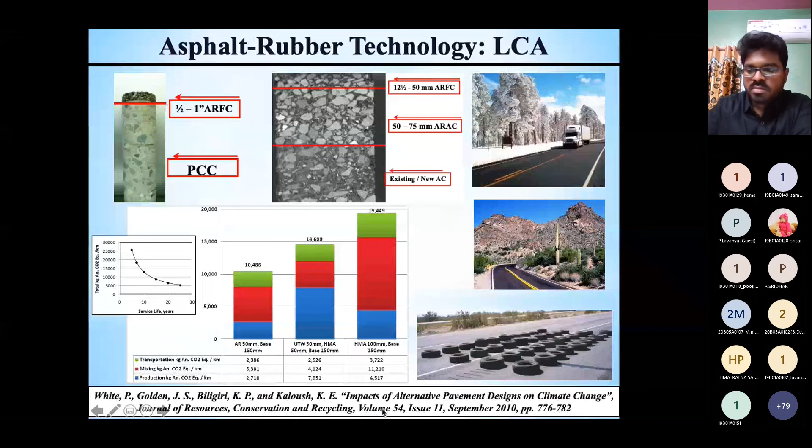Now, the new generation product we have developed, we call it MargPave, Modified Asphalt Rubber Green Pavement. It's one of the PhD products we finished just a couple months ago. It's now a semi-dry process, which we call dry mixing.

Why do we call it dry mixing? Because people have always used rubber with asphalt binder, which emits a lot of fumes at very high mixing and compaction temperatures, approximately 190 to 200 Celsius. What we can do with our new product is use it as a patching material for pothole patching, and we'll be trying this very soon.

We have a collaboration with the Petroleum Conservation Research Association, where we will be encapsulating these rubber products, which can be used straightforward in the pug mill. When I say pug mill, you have a MAR product, our modified asphalt rubber, in powdered form. It's like a fiber - you use binder separately and the aggregate, so you mix it as a dry process.

So basically, you don't need any sophisticated equipment for this. It's very quick, and you can use it as a pothole patching material with no need for expensive equipment. So if there are industry people in this conference, please approach us, we will help you out with this.

We are now in discussion with the Petroleum Conservation Research Association, especially with the consortium of Indian Oil Corporation and Bharat Petroleum. The last thing I'll share with you, taking another 5 minutes, is pavement asset management.

As I mentioned, best construction practices and materials are important, but apart from that, we also have to manage our assets. How do you do that? We know for a fact that pavements will deteriorate over time, similar to us, they also age. If you don't take care of them, they will have premature failure such as cracking, potholes, you name it - it's there. So you have to address those and have maintenance interventions taking place.

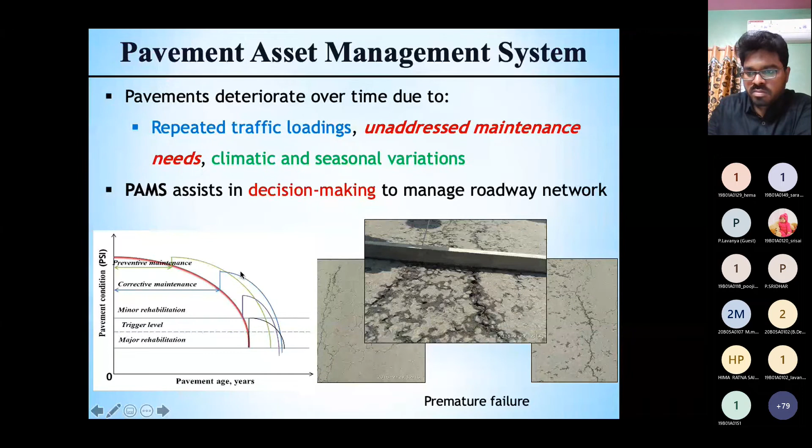As you see here, one of the plots is a classical plot of pavement condition versus pavement age. Over time, the material deteriorates in this nature. If you have to maintain those assets, you'll have to do either preventive maintenance, corrective maintenance, or even a major rehabilitation to bring back the condition of the pavement as it was during the first day of construction.

Now how do you do that? You have a PAMS, Pavement Asset Management System, and in the last 4 years we have worked with the AP State Road Development Corporation. They've given us data for the entire state, almost 1.4 million data points, or 14-15 lakh data points. We have used that data for prioritization optimization, creating our PAMS for the state, which includes about 5 or 6 modules including prediction, detection, analysis, and rehabilitation. We haven't gone into the cost yet, which will be our next step, but for now we have done this.

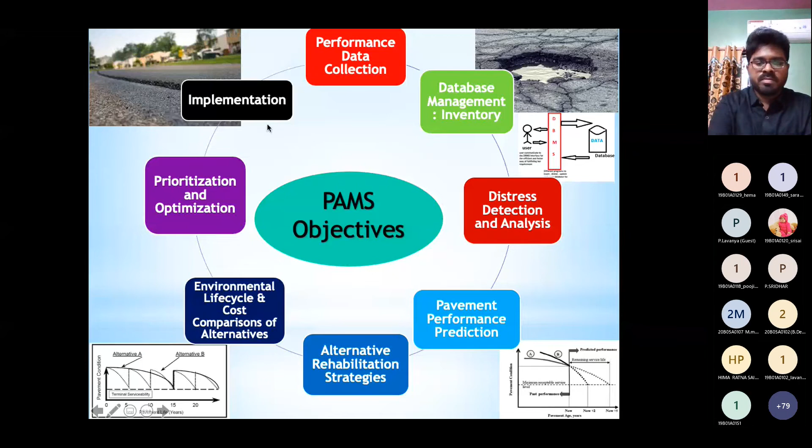One is, as I mentioned, pothole detection, multi-distress detection, coming up with engineering criteria based UPHI, that's Unified Pavement Health Index, and also a delineation approach - 4 or 5 modules that we have come up with. I'll take you through this very briefly.

One of the things published in a proceeding, International Conference on Maintenance and Rehabilitation, is on pothole detection, quantification, and maintenance. So you have a pothole, we will be able to detect it with our algorithm, and come up with the amount of material required for patching. So it's a twofold approach there.

The second thing is the multi-distress module. We are able to detect about 18 distresses with our module using YOLO architecture, You Only Look Once, version 4. It's published again in the Transportation Research Record, an international journal.

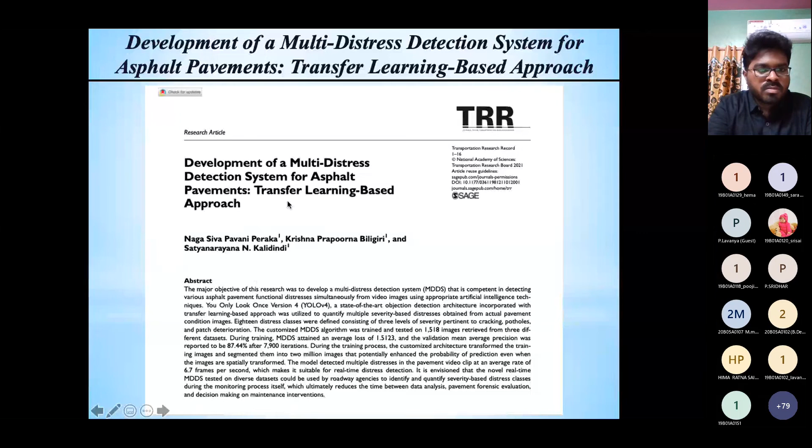Please visit this website and download. One final slide I thought I'll share with you is what do you expect with all of these: we definitely have to continue monitoring our pavements.

Noise. Yes, sir, please proceed. Sorry, sir, yeah, yes. Okay, no problem.

So what we have to be doing now is to build some test sections, and that's what we are doing now with NHAI. One project we have with the National Highways Authority of India is to come up with amendments to the existing IRC 37 flexible pavement design guidelines. We have about 200 kilometers of roadway stretch which will be used for instrumentation and monitoring, as part of the long-term pavement performance program.

We are also in discussion with the Ministry of Road Transport and Highways to build some test sections, and also come up with advanced tools. We have done that a little bit with AI, artificial intelligence, machine learning, and so forth. We have come up with pavement asset management, and we will proceed further with cost considerations. Finally, what we should be doing is establish mechanistic design.

How do we do that? You have to have lab-to-field correlations of very high order, and finally foster collaboration between academia and industry. As I keep saying every time, we need industry coming forward and academia going forward too, to help industry solve several burning issues that are there.

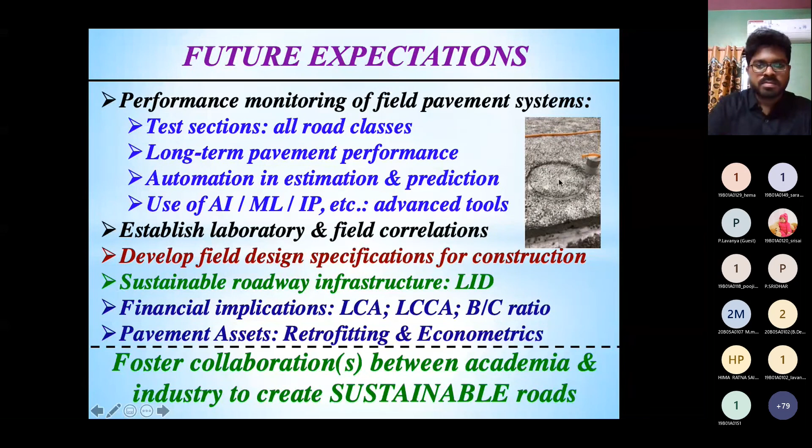As you can see here, one video where you have water percolating into the pervious concrete pipes, the rings, and then you can use that water elsewhere.

Just thought I'll share with you our laboratory facilities. As department head, I also have the duty to tell you that we have six streams within civil and environmental engineering at IIT Tirupati. Please feel free to visit our lab facilities, more than 5,000 square feet, which we'll be expanding to about 10,000 square feet within the next 6 months.

More than about 25-30 crore worth of equipment, all of it state of the art. It was built within a record time of 10 months for a new IIT, for a new institution.

If we talk about just pavements, please visit this website whenever you have time. We have fundamental research going on in binder, aggregates and mixtures. We have advanced research with excellent equipment—in fact, this is the best equipment doing both asphalt and concrete pavement testing, one of the best in the world, world-class DTS 30.

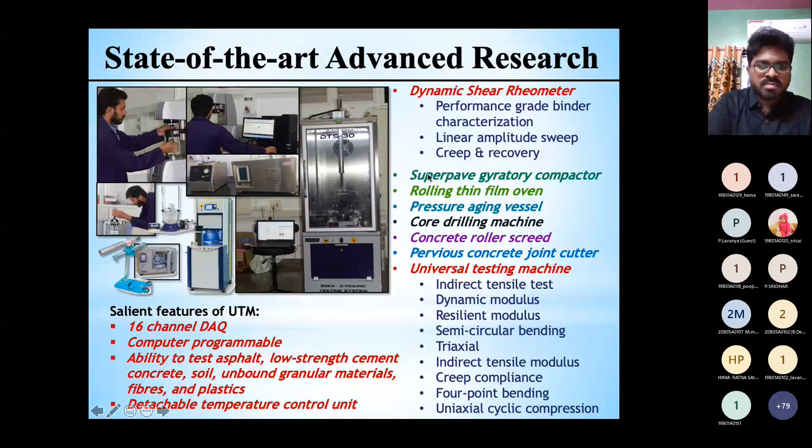The ongoing research within our group includes NHAI collaboration, KHRI, Kerala Highway Research Institute, APRDC, the Road Development Corporation of the state, and Petroleum Conservation Research Association. Recently we also got a 13 crore project from the Ministry of Road Transport and Highways.

So we'll be building a national facility for accelerated testing of pavements, a circular facility as you can see here—a regular pavement section built over 50 meter by 50 meter land space. Please feel free to come in the next year, when we'll be commissioning it. The Honorable Minister will be here for the inauguration.

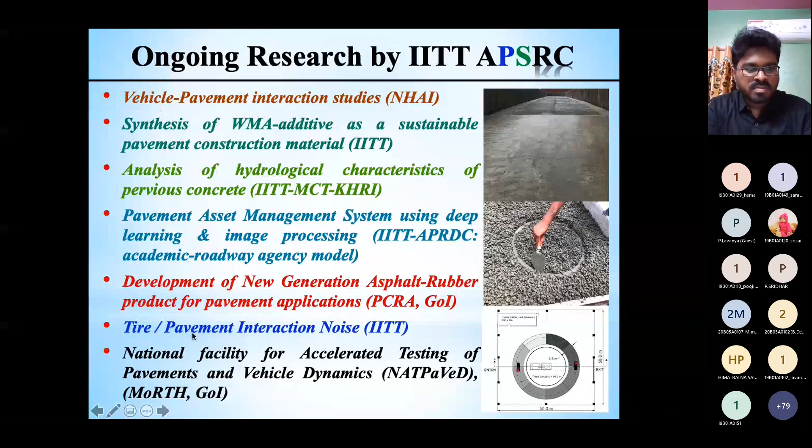We also have projects with DST. IIT Tirupati is working with DST on tire-pavement interaction. Several of my colleagues, thanks to them, I've been working with US and Europe. Then I was at IIT Kharagpur, then IISc Bangalore, and now at IIT Tirupati.

Please visit our website and feel free to contact me for anything. That's all I have.

Thank you very much, sir. Thank you—yeah, I can take up some questions if you wish.

Good morning, sir, this is Dr. Sridhar. I'm working as an associate professor in the civil engineering department, Sri Vishnu Engineering College for Women. I would like to ask one question, sir.

In the previous slide you showed image processing—whether it is satellite image processing or any picture taken on the ground. That's correct, yeah, it's a picture that was taken by NSV, Network Survey Vehicle. The APRDC conducted a survey across about 50,000 kilometers.